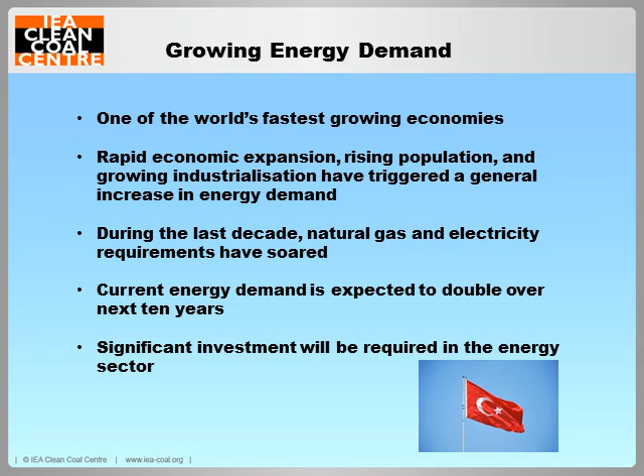Now, like many countries, Turkey faces energy supply issues. Here, indigenous energy resources are limited almost exclusively to lignite and to a lesser extent hard coal. As a result, it relies heavily on imported sources of energy. More than 90% of its oil and 98% of its natural gas is imported, as indeed is much of the hard coal used. The cost of all this is considerable. In fact, it accounts for around a quarter of the country's entire annual import bill.

So it will come as no real surprise that the major government objective is to reduce this high dependency, particularly through making greater use of indigenous lignite. As part of this, as we'll hear, the government has introduced various incentives to encourage its greater use.

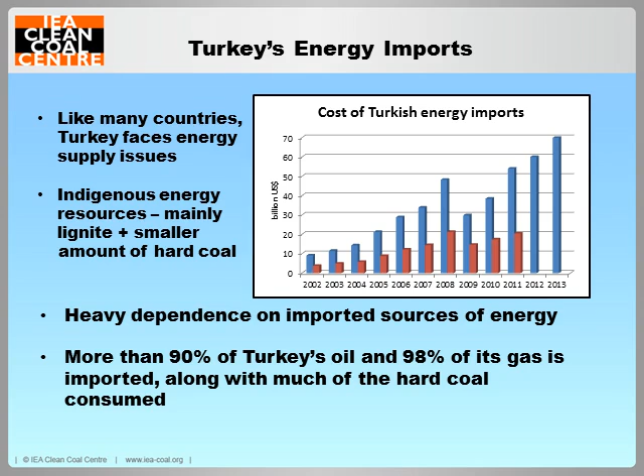Now, like a lot of industrialised countries, Turkey relies mainly on a combination of fossil fuels plus renewables for its energy supply, and this is where most of the power currently comes from.

Coal: the country produces energy from its own reserves of lignite and hard coal, and also imports quite a lot of hard coal. Oil is produced mainly in the southeast and northwest, but since 1991, when production peaked, output has been falling as reserves have become increasingly depleted. At the moment, around 93% of the country's oil is being imported.

Gas. Well, like oil, most of Turkey's gas is imported - in fact, usually between 98 and 99%. Since 1990, there's been a tenfold increase in consumption for power generation, and at the moment around 45% of Turkey's electricity comes from gas-fired stations. Given that electricity demand is expected to continue rising until at least 2020, and despite efforts to promote other forms of energy, gas demand is expected to continue increasing for some time.

Nuclear: the introduction of nuclear power forms an important component of Turkey's strategy to diversify its energy mix and reduce its heavy dependence on imported sources of energy. Two projects are currently in development and a third is planned.

And finally, renewables. Apart from hydropower, renewables are still largely underutilized in Turkey. Ironically, it's one of the windiest and sunniest places in Europe, and yet despite its large solar and wind energy potential, these have only been developed in small pockets. However, there is an ambitious target to generate 30% of the country's electricity from renewables by 2023. But whether this will be achievable within the timescale, we shall have to wait and see.

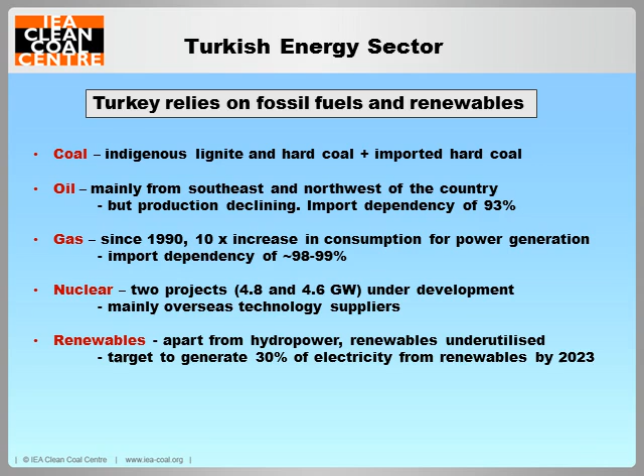And of course, as we've already mentioned, the country also has a lot of lignite and some hard coal that it intends to capitalise on, and we'll look at this shortly.

So, a lot of new investment is going to be needed to meet Turkey's growing energy demand, especially for natural gas and electricity. In the case of electricity, by the end of 2014, installed generating capacity is expected to have reached around 64 gigawatts. And although forecasts seem to disagree a bit, there's a goal to increase this to somewhere between 112 and 125 gigawatts by 2023, the centenary of the founding of the Republic.

Similarly, estimates of the scale of investment needed vary, but the Turkish energy market regulator reckons that for the period 2010 to 2020, somewhere between $225 and $280 billion will need to be invested in the energy sector.

Now, on the back of this, recent years have seen Turkey become an increasingly attractive destination for foreign investment in general. At the moment, much of this is coming from EU member states, followed by North America and Asia. So alongside Turkish companies and banks financing power projects, in the past few years there's been a growing number of overseas investors getting involved, and these are just a few examples. As you'll see, many of these have been for gas-fired projects, although more recently emphasis on coal has been increasing.

In some cases, investment opportunities encompass both mining operations and power generation, and again, interest is coming from overseas investors. For instance, a number of major Chinese players are investing in lignite production and power generation projects within Turkey that will run into many billions of dollars.

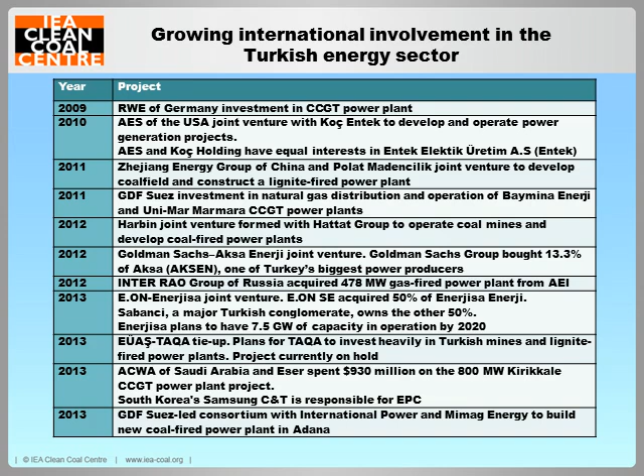Now, current estimates suggest that Turkish coal resources exceed 13 gigatons. This is made up of nearly 12 of lignite and 1.3 of hard coal. However, particularly in the case of lignite, exploration is still taking place and additional reserves continue to be discovered. So far, many areas of the country have only been explored at shallow depths and others not at all. Consequently, it's anticipated that even more significant reserves will, quite literally, be unearthed.

Discoveries made within the past few years have added nearly 6 gigatons of lignite resources to the country's total. This has included 1.8 in the province of Konya, capable of powering 5 gigawatts of generating capacity for 30 or 40 years, and as recently as last July it was announced that a further 950 million tonnes had been discovered in the western province of Afyon, capable of supporting 3.5 gigawatts of power projects.

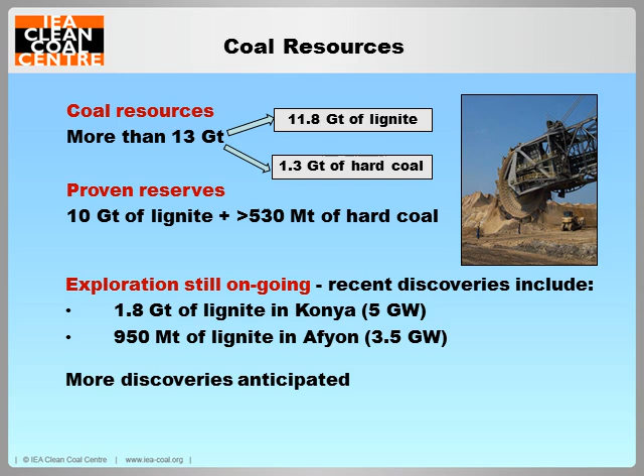So just where does all of Turkey's lignite and hard coal actually go? Well, perhaps not surprisingly, most of the lignite produced goes directly to major power plants, usually sited in fairly close proximity to the mines. In some cases, it's fed directly by on-site conveyor systems. Much of the remainder is consumed by various industrial users, such as the iron and steel sector, cement producers and sugar factories. However, some is also used for domestic and commercial heating.

In the case of hard coal, both domestic and imported, this is supplied to power plants, coking plants, the iron and steel sector, various other industrial users, and some again is also used for heating applications.

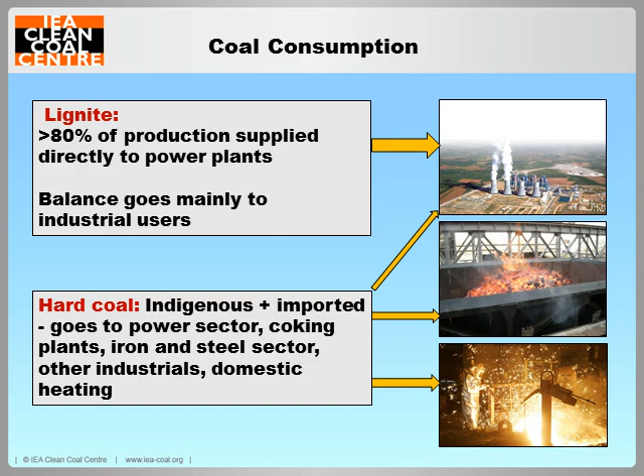Now let's turn our attention to the coal-fired power sector. The main lignite-fired fleet is made up of around 15 major stations. These are a combination of pulverised coal combustion and fluidised bed plants.

Now, in the case of hard coal, there's only one major plant supplied by Turkish mines, but there are also 6 that rely on imports. There are also a lot of new projects at various stages in their development. Some will be fired on lignite and others on hard coal. With the latter, there are at least 7 major projects ranging between 350 and 1300 megawatts being developed that plan to use supercritical steam conditions. There's also a growing number of fluidized bed combustion plants being developed, a technology that's already well established in Turkey.

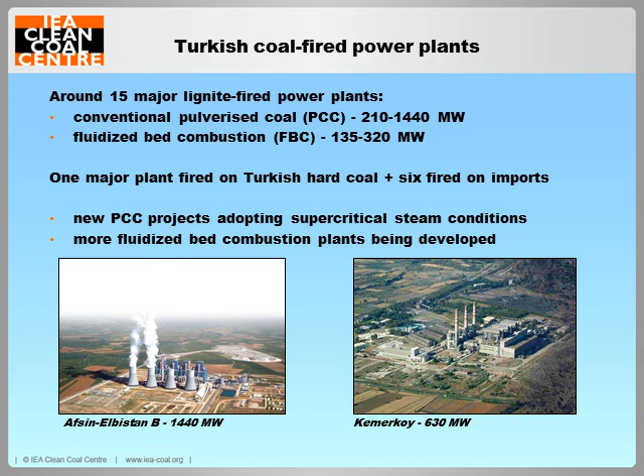So, as we now know, Turkey has both hard coal and lignite, and the deposits of the latter are by far the biggest. As you can see, there are a number of organisations that are directly involved with the coal sector in some way. The main one is the state-owned TKI, or Turkish Coal Enterprises.

This produces lignite for power plants and other users. There's the state-owned TTK, or Turkish Hard Coal Enterprise, responsible for hard coal supply, but not involved with lignite. There's the state-owned EÜAŞ, or Electricity Generating Company. This also mines lignite, but only for its own power plants. And there's also the Directorate of Mineral Research Exploration, which, as its name suggests, is responsible for exploration activities associated with both lignite and hard coal.

And of course there's the private sector, active in both lignite and hard coal production. In the future, a growing proportion of the country's coal assets will be transferred to the private sector, a process that's already underway.

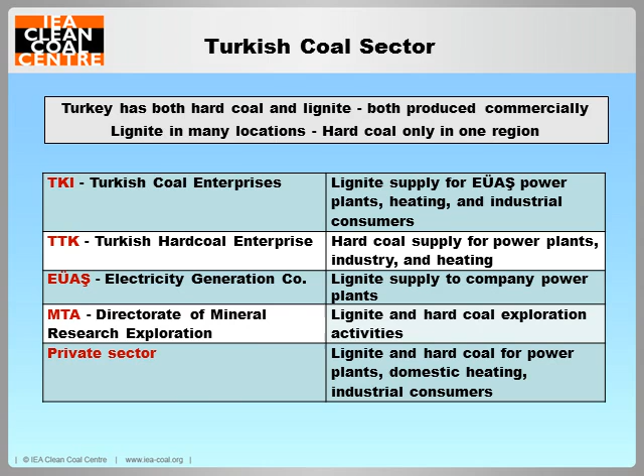So lignite is by far Turkey's most important energy resource, with deposits available in all geographical regions. In fact, it's present in more than 40 individual provinces. As exploration is continuing to take place, potentially lignite, and indeed hard coal, reserves could be much greater than current estimates suggest. At the moment, nearly 90% of lignite reserves are operated by public sector organisations, and this shows you the breakdown.

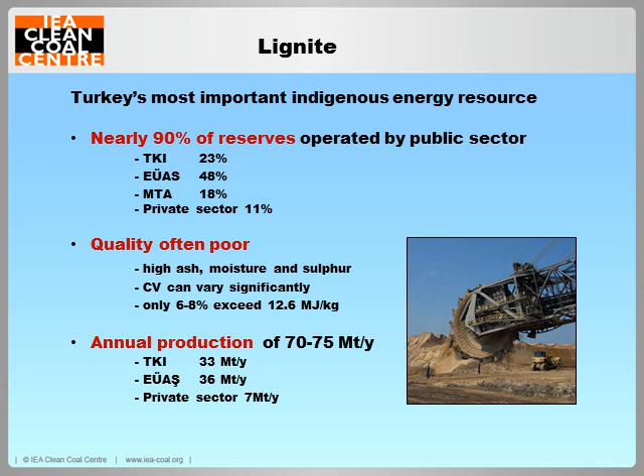Now, even though the quality can be poor or variable, it's an important energy resource, and significant amounts are mined each year. In a typical year, total lignite production is usually around 70 million tonnes, although it has been up to nearly 75.

Now, as I mentioned, unlike lignite, hard coal deposits in commercial production is limited to a single region, namely the Zonguldak Basin in the northwest of the country. Here, Turkish Hard Coal Enterprise, or TTK, essentially owns all such reserves. TTK effectively has a monopoly on the production, processing and distribution of hard coal within Turkey.

However, some of the company's coalfields are in the process of being privatised, and some of the ones so far transferred to the private sector are now being operated on a royalty basis. But TTK is still the country's main hard coal producer, as at the moment the private sector produces only around 8% of the total.

However, this does mask the fact that about 35% of production reported by TTK is actually mined by private companies working under subcontract, so the private sector's influence is greater than it might at first appear.

Now, unlike lignite, national production is quite modest. It's usually around 3 million tonnes a year, a number that falls far short of the amount needed, which is usually around 30 million tonnes, for power generation and industrial use.

Consequently, like oil and gas, the rest has to be imported. But looking to the future, the ongoing restructuring and privatisation of the hard coal sector is expected to boost production, and by 2023, various forecasts suggest it could be up around the 12 million tonne mark. So it still won't meet all demand, but potentially could make a sizable dent in it.

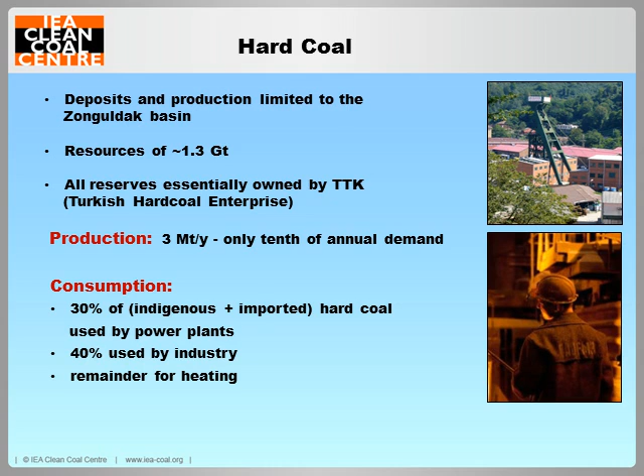Now, as hard coal production can't meet demand, around 90% of it is imported. In 2012, imported steam and coking coal was nearly 30 million tonnes, plus there was also 4 million tonnes of petcoke brought in. So this combined total often exceeds 30 million tonnes a year.

In the near term, as some of the new coal-fired power plants come online and iron and steel production expands, imports are expected to increase by at least 2 to 2.5 million tonnes a year.

At the moment, in a typical year, power plants fired on imported hard coal generate around 12% of Turkey's electricity, with those using domestic coal providing another 1 to 2%. At the end of last year, nearly 4 gigawatts of hard coal-fired generating capacity was being fired on imports.

Plus, there were a further 2.3 gigawatts of new projects at various stages in their development. With the way things are developing in the foreseeable future, Turkey is expected to become one of the world's fastest growing coal importers. And this figure here, this picture, is just to give you an example of a major Turkish power plant that relies on imports.

This is the 1.3 gigawatt Sugozu plant. It generates around 4% of Turkey's electricity and is based on a similar design to a number of high-efficiency power plants in Germany. Now, clearly, in order to access the supplies of imported coal, it's located on the Turkish coast.

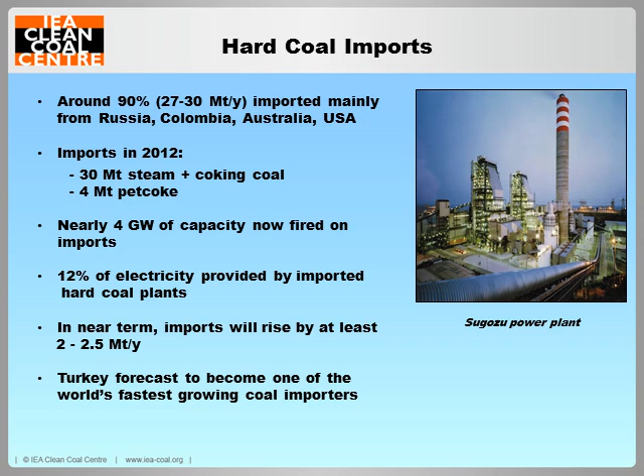And this is how it gets its coal. The plant uses up to 30,000 tonnes a day, brought in using one of the world's largest floating coal trans-shipment terminals. This handles 3 million tonnes a year, with coal usually delivered by Capesize vessels, mainly from Colombia and South Africa. Cranes on the facility unload the coal from the ship onto a conveyor belt system which discharges it into

what's called an HSU, or hopper self-unloading unit, which is moored between the twin hulls of the trans-shipment facility. Once an HSU is loaded, it's then pushed by tugs 2 miles to the jetty, where it's emptied using its own self-unloading system. A shoreside conveyor belt then transports the coal directly to the power plant. Using this, normally a Capesize vessel would take around 4 days to empty.

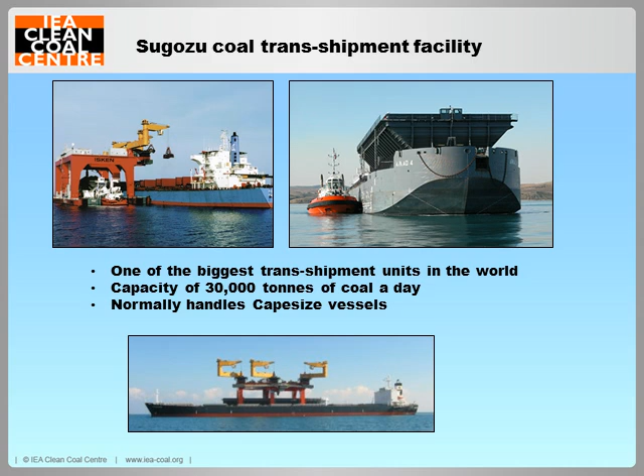Now, the Turkish government is making serious efforts to reduce expensive and potentially unreliable energy imports and make greater use of indigenous resources. As part of this, 2012 was designated as Domestic Coal Year, and this was backed by government policy initiatives that gave increased priority to the use of domestic lignite for power generation.

A coal strategy has since been adopted, and these are some of its main aims. In essence, they focus mainly on diversifying energy sources and supplies and the reduction of energy imports through the greater use of domestic resources. Over the next decade, a major aim is to reduce the country's share of electricity generated by gas-fired stations from the current level of around 40% to less than 30%.

This is being given a further push by the ongoing privatisation of various Turkish coalfields and power assets. There's a goal of achieving an additional 18 gigawatts of coal-based installed generating capacity within the present decade, and an overarching goal of reaching somewhere between 100 and 120 gigawatts of capacity by 2023, nearly double that of today's total of 64.

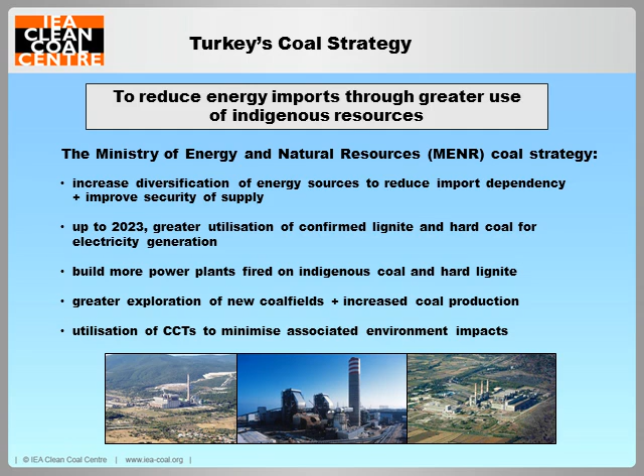There appears to be quite a strong commitment at government level to the use of some of the cleaner and more effective coal-based systems for power generation, as well as general support for applications of CCTs in various other ways, such as gasification. These measures appear to be having some effect, as applications for new gas-fired plants have fallen, with investors withdrawing or cancelling some proposed projects. And at the same time, applications for coal-fired plants have been increasing dramatically.

At the moment, thermal and hydro plants provide the bulk of Turkey's electricity, and this was the situation in 2011 to 12. But as I've mentioned, the plan is to add nuclear power and more renewables to the mix, so that by 2023, the aim is that roughly 30% of Turkey's electricity will come from coal, 30% from hydro and other renewables, 30% from gas, plus now 10% from nuclear.

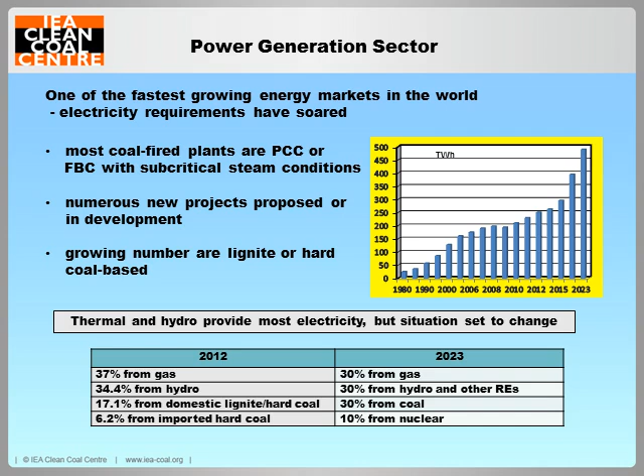Now, coal washing is clearly beneficial as it reduces ash content to more manageable levels, helps avoid the need to handle and transport unwanted inert materials, and also minimises problems when it's burnt at the power plant. There are a growing number of coal washers in use, with most of the bigger units having been brought online since 2004. TKI, or Turkish Coal Enterprises, and its contractors alone has a washing capacity of more than 24 million tonnes a year. At the moment, around 40 to 45% of the country's total lignite production is being washed, and new washing capacity continues to be added to the sector.

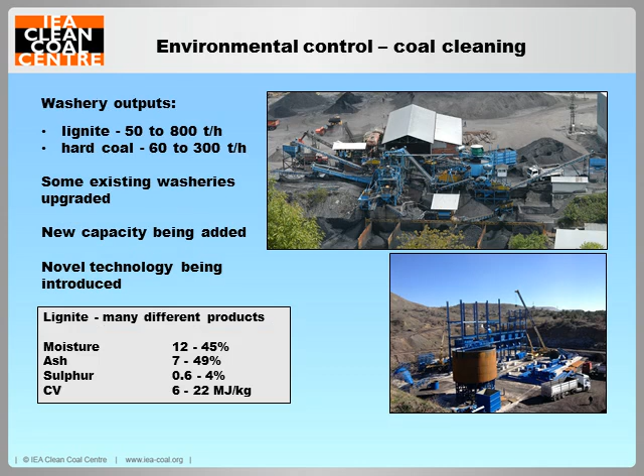Interestingly, new cleaning technology is also in the process of being introduced, some of it developed by Turkish companies. For instance, CWP of Izmir is installing an advanced washery based on what it calls its tri-GFC or three-product gravity feed cyclone separator technology for a coal directorate in Amasya, which is shown in the lower picture being built. This will be the first such application in Turkey, and once the plant's effectiveness has been confirmed, it's likely to be replicated at other sites.

Although most of the larger power plants now have some form of FGD, some of the older ones don't. However, most of these are expected to be suitably re-equipped and upgraded as they're sold into the private sector. The lack of equipment such as FGD is usually factored into the selling price.

Now, when it comes to controlling particulates, all major plants use various types of ESP, and alongside this, several of the hard coal plants also deploy a combination of low NOx burners and SCR systems for controlling NOx emissions. All new plants in development or under construction will be equipped with comprehensive emission control systems to control SO2, NOx and particulates. And plants that lack suitable emission control systems have been given until 2019 to remedy the situation.

Now, moving further down the production chain, what happens to the solid waste produced from electricity generation? Well, as you've heard, lignite-fired power plants produce a lot of the country's electricity, so large tonnages, often with a high ash content, are used, and consequently significant amounts of combustion residues such as fly ash and bottom ash are generated. Ash and slag plus gypsum from FGD units makes up most of the solid waste produced.

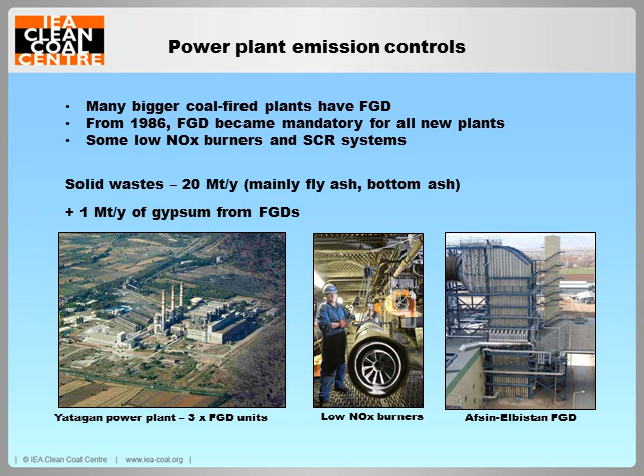Annually, Turkish power plants produce more than 20 million tonnes of such residues, but not all of this is dumped, and some fly ash is used for cement and concrete manufacture. In addition to this, nearly 1 million tonnes of gypsum is produced from FGD operations, and although a lot is landfilled, some is used for wallboard manufacture, for instance from the Sugozu plant that we saw earlier.

Now, in 2012, EÜAŞ thermal power plants generated just over 1/5 of Turkey's electricity. However, the Turkish generation sector, formerly dominated by EÜAŞ, is being progressively opened up to the private sector. Significant progress has been made in this process, and in recent years, publicly owned generation has dropped from 78% to 46% of the country's total.

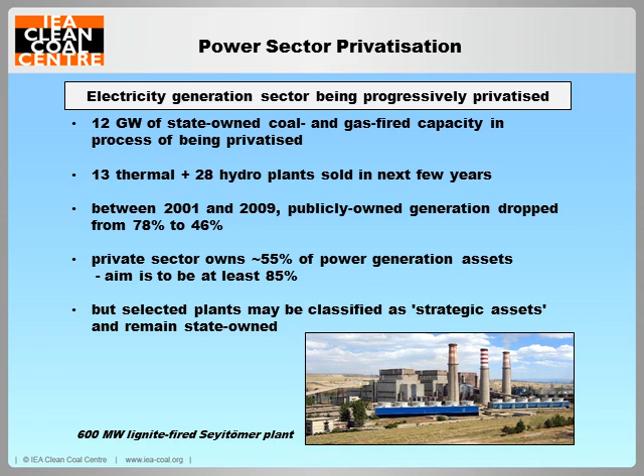As elsewhere, much of the lignite is produced here from large open cast mines, although there is, as here, clearly also some underground mining. The explosion here took place some 2 kilometres underground, and the resulting fire burned into the 15th of May. More than 300 miners were killed in what was the worst disaster in Turkey's mining history.

Now, some Turkish hard coals and lignites have been shown to be quite gassy. They can contain quite high levels of methane. In the case of hard coal, some of these have an unfortunate tendency for spontaneous combustion, and this has caused a number of serious mine fires in the Zonguldak region. Spontaneous combustion was found to be responsible for at least some of these. And on occasions, high concentrations of methane have been responsible for mine fires and explosions.

Now, for an explosion of this type to occur, important factors are often the levels of coal dust and/or methane present. And although the precise cause of the explosion and fire at the Soma mine is still under investigation, it seems quite possible that methane may have played a part. Sadly, mining accidents have been fairly common in Turkey. The only hope from this disaster is that the lessons will be learned from this and used to prevent similar tragedies from occurring in the future. Let's certainly hope so.

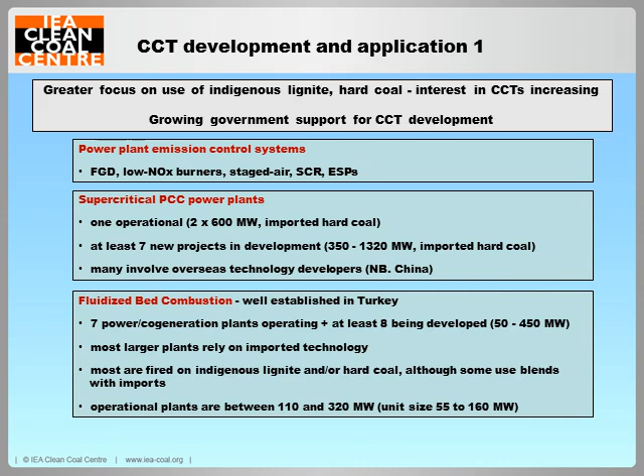With the aim of reducing national gas imports, TKI has set up a new pilot-scale entrained flow gasifier in the town of Kütahya. This became operational at the tail end of 2012 and is gasifying local lignite to produce SNG, or synthetic natural gas. Apart from its use to replace natural gas for power generation, it's also to be evaluated for the possible production of methanol, various chemicals, and liquid fuels.

TKI is exploring the system's potential to eventually produce perhaps 1 to 1.5 billion cubic metres a year of SNG, and this would be sufficient to meet almost 10% of Turkey's natural gas requirements. Now moving on, IGCC. Well, clearly Turkey's got no commercial IGCC plants, although its lignites continue to be evaluated by various organisations with this eventual use in mind.

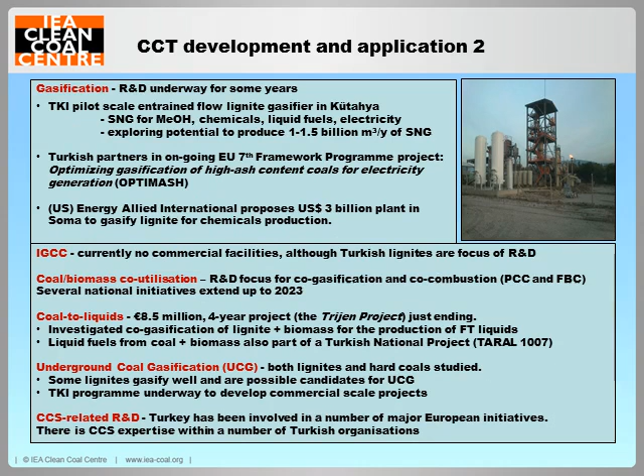And finally, carbon capture and storage-related activities. Turkey has been involved in a number of major European CCS initiatives, and there is some expertise on these technologies within a number of Turkish organisations. It seems likely that emphasis on this area will increase as greater volumes of lignite come to be used within the country.

And so to close, the country has weathered the global economic storm much better than many others have, and its economy is doing very well. Electricity demand is rising rapidly and is expected to carry on increasing for the foreseeable future. But there are energy supply issues and a heavy reliance on expensive imports, particularly of gas and oil. To help counter this, a coal strategy is now in place aimed at using more indigenous energy resources, particularly lignite, to help minimise imports, but to also help bolster security of supply.

The country has a lot of lignite. Although much of it is poor quality, it's widely available, can be produced cheaply, and more is still being found. Hence, it's of particular importance to the Turkish energy sector. Each year, the country imports up to 30 million tonnes of hard coal, a level that's expected to increase quickly. Much of this goes to the power sector, and this, and some coalfields, is in the process of being privatised, with assets moving increasingly to the private sector.

In terms of clean coal technologies, well, Turkey already has some supercritical PCC generating capacity, as well as a number of fluidized bed plants in operation. There are more of both in the pipeline. And in this respect, it's good to see cleaner, more advanced technologies being applied on a commercial basis, and the promise of quite a lot more to come. So even allowing for the fact that some targets could be best described as ambitious, and that some proposed power and mining projects may not go ahead, everything points to the coming period being a busy one for the coal-fired power sector and for Turkish coal industry in general.

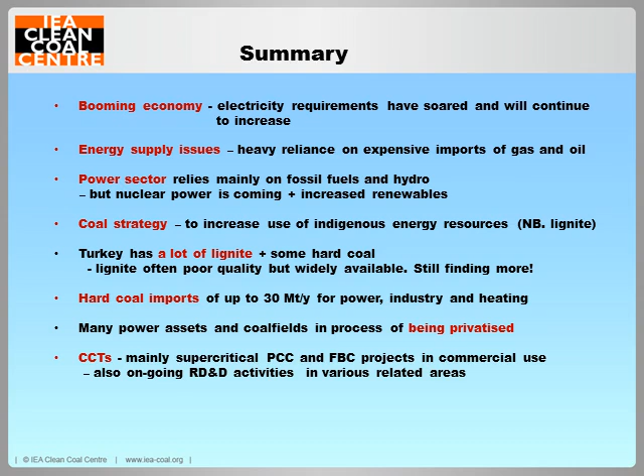That's an interesting one, the first one. What plans are there to reduce carbon emissions? At the moment, much of this is really fairly low on the agenda, it seems. Turkey has been involved with quite a number of overseas multi-partner projects through the EU, and so they are engaged in that side of things, but there are no demonstration plants planned at the moment that I'm aware of. Much of what they are planning to do is focusing on the power sector in particular, where they're aiming to reduce CO2 emissions from coal-fired plants by generally increasing their performance and effectiveness.

So there's a fairly extensive rehabilitation program in place, and obviously, as I've mentioned already, the plan is that a lot of the new major power plants will be using more effective systems such as supercritical steam conditions, which obviously increases the efficiency and reduces the CO2 output per kilowatt. So I think that's where a lot of the focus is at the moment, although I suspect in the coming years, as the greater use of lignite does take off, that Turkey will become more engaged in this.

From which countries do the coal imports come? Is there a preference for Russian coal or coal from Eastern Europe? There doesn't seem to be. Coal comes from Russia, it comes from South America, it's coming from the USA, I believe some is coming from Canada. So they're pretty well situated geographically to pull in supplies from quite a few other parts of the world. So there doesn't seem to be a particular preference. I think it'll all come down to the price mainly.